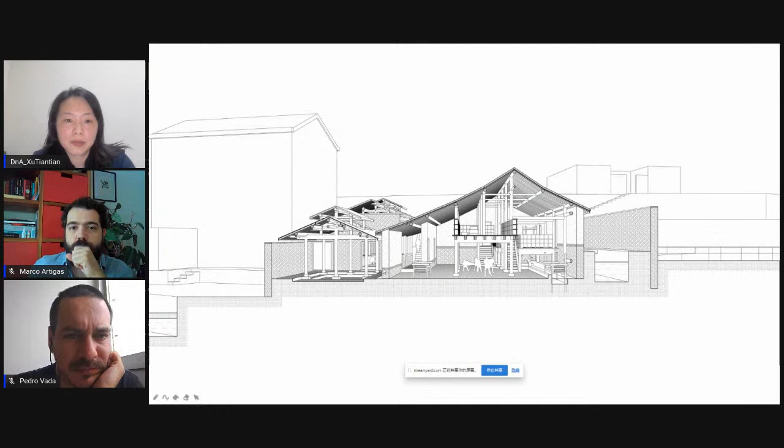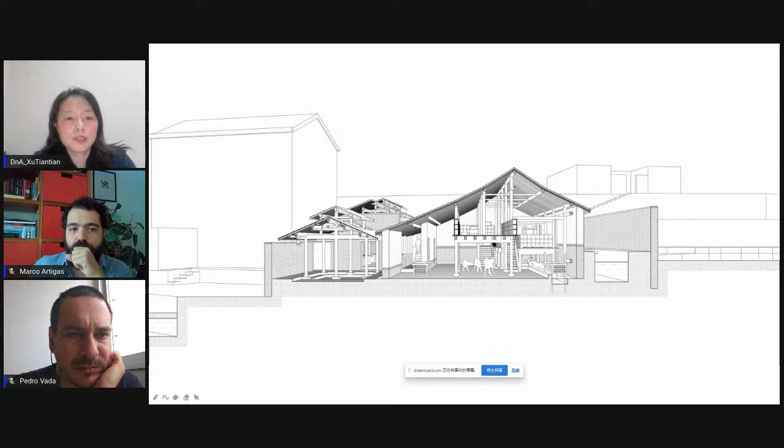The new parts extend out. This is the original mill workshop in the middle, and the new additions are wrapping around it with these stone walls and central wooden traditional structures. All these new additions are done by the local villagers with local techniques.

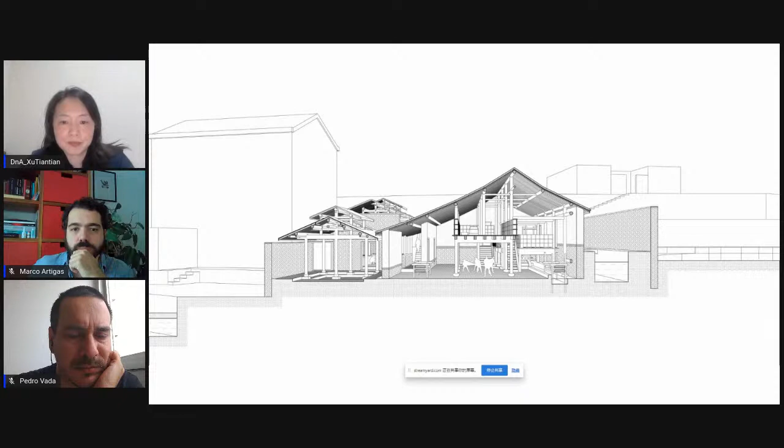From outside, you can see that the old house, the old workshop, is surrounded by or hiding behind all these new additions, facing the creek and facing the mountain.

These are the new additions looking back towards the old house. It's like a kind of embedding in between, adding new layers to the original workshop. You really have to walk into it and go through the layers to explore the ancient mill workshop.

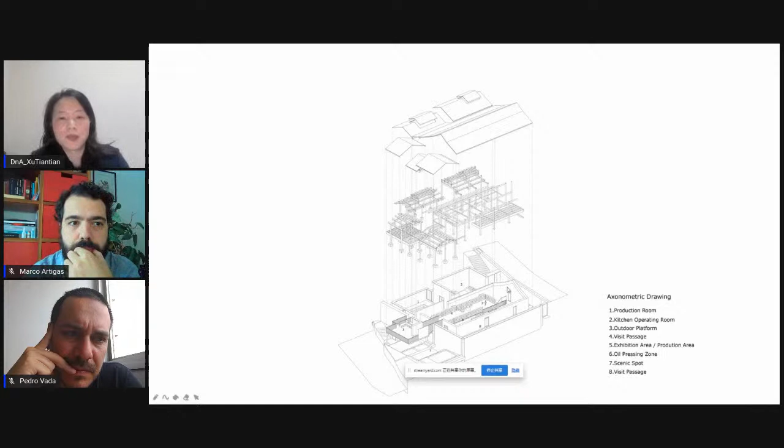This is a picture showing the new additions as kitchens. If you walk into the space, this would be the original space, and all these milling tools or facilities are kept as original.

This is the water wheel, driven by water power guided from the creek inside the space, and the extraction tool, the wooden tool to extract the oil from the camellia seeds.

This is the water wheel, which when activated by the water coming in here, will turn around.

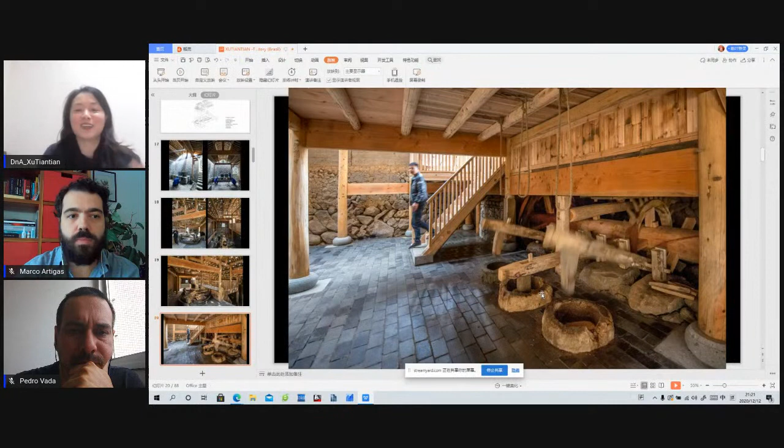I don't know if you have seen this, or do you have that in your country? I think this is one of the common facilities in Chinese villages, almost like a public kitchen or public milling meal house in the village.

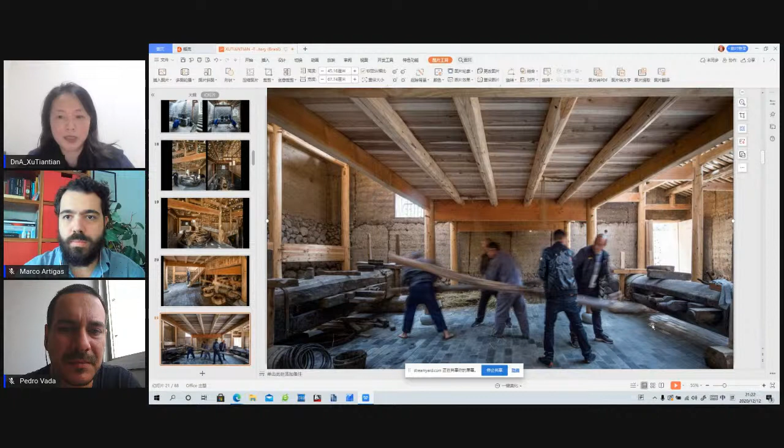That's the extraction machine. Wooden tools are kept as original, and it's used by the labor, by the villagers, for the oil production.

The whole story around this is that the original ancient house is kept as it was before, and it's wrapped by new additions. When you walk into the house and come inside the center of this whole project, you discover the motion and sound of the water power and all these wooden tools, which really make the soul of the space. So in this project, it's about all this kind of finding and the sound, the noise, guiding you through the layers of space.

And here we didn't make any new additions except on the roof. You will see the kind of lighting quality that it's natural light. It's only replacing the original tiles with a different kind of glass tile, which is also a local material. So by adding this light, it's adding a sense of dramatic atmosphere. The whole project is to reveal and set more chapters before you enter and finally discover the central heart of this ancient mill house.

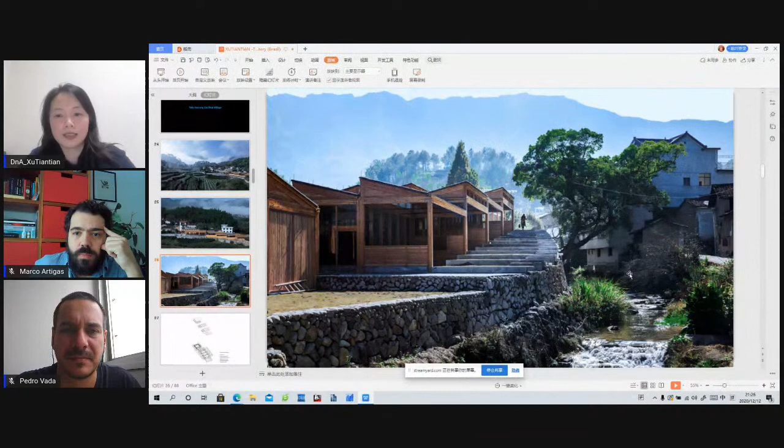The whole factory takes over the terracing site by the entrance of the village, following the topography. Facing one side is a street, and on the other side is a creek again. This is a different village, but for some reason all these mountain villages have a creek running through. I think this was also the original principle when the first generation of villagers arrived here—they picked this site to build up their village and stayed here for 10, 20, or even hundreds of generations.

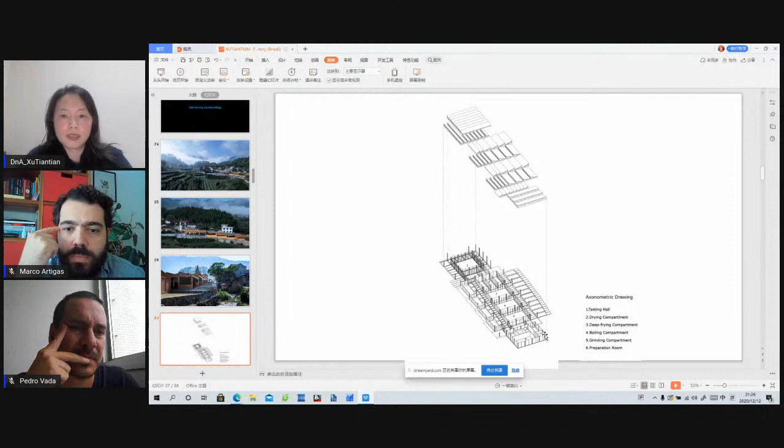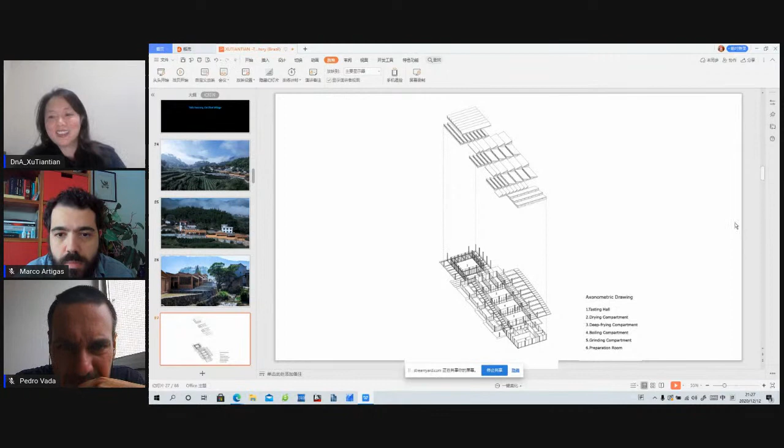That's the Tofu Factory. It's basically a one-story project, building and taking up the terraces along the topography, and the whole factory is divided into six compartments: preparation room where the original material comes in, then grinding compartment, boiling compartment, deep frying compartment, drying and cooling compartment, and also the tasting hall. So we will get to see how tofu is produced in a bit.

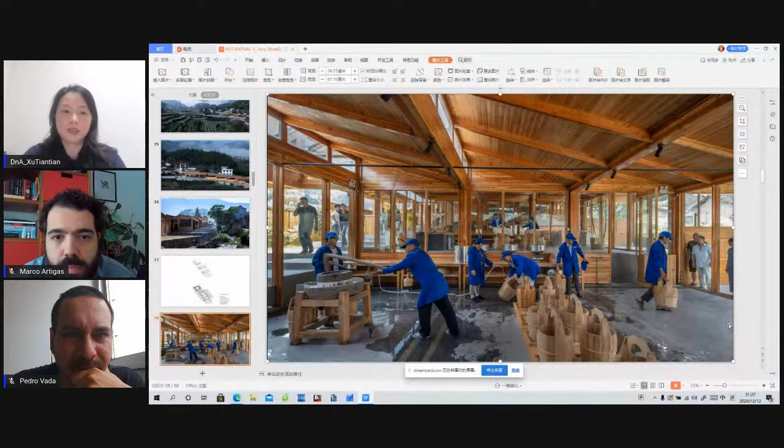These are the factory spaces. Like I said before, this is run by the villager union, and the family workshops become the shareholders of this whole village factory as a collective economic entity. The production is by one of the villager unions organized by the family workshops.

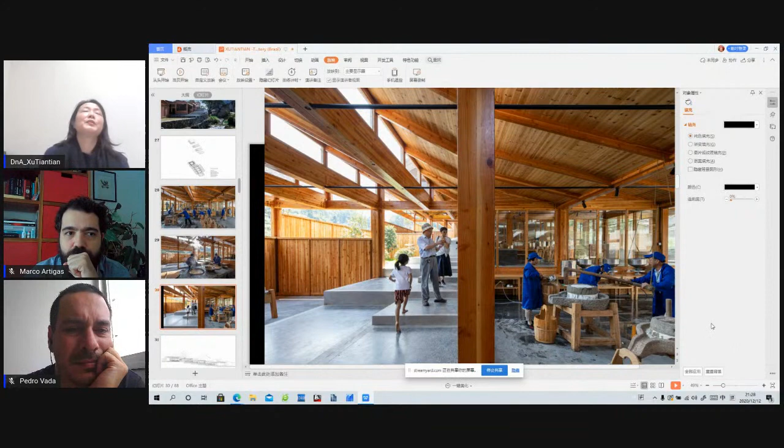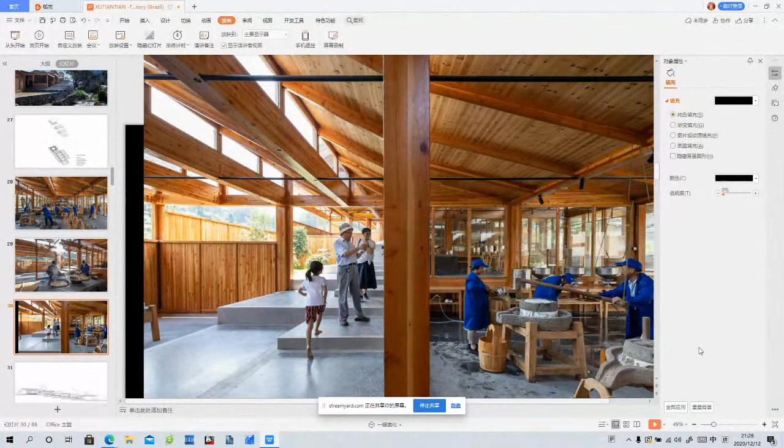There's also a walkway, a passage for visitors to watch the production process. In a way, all this production, either tofu or other unique productions in other villages, become the heritage of this village—intangible heritage—and also become a live museum to showcase the traditions. We think all these agricultural productions are also the heritage and history of individual villages, so in a way, these production factories are also village museums.

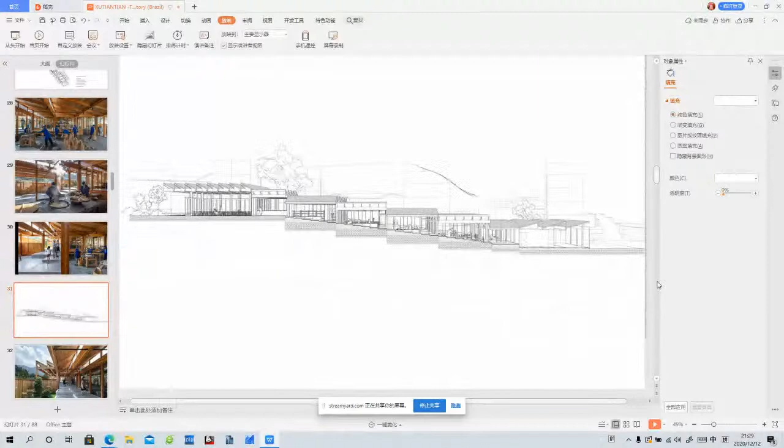That's the section cutting through the space. This is the walkway for the villagers and also for the visitors—a space shared by both. Most of the time it's used by the villagers as a public, leisure space.

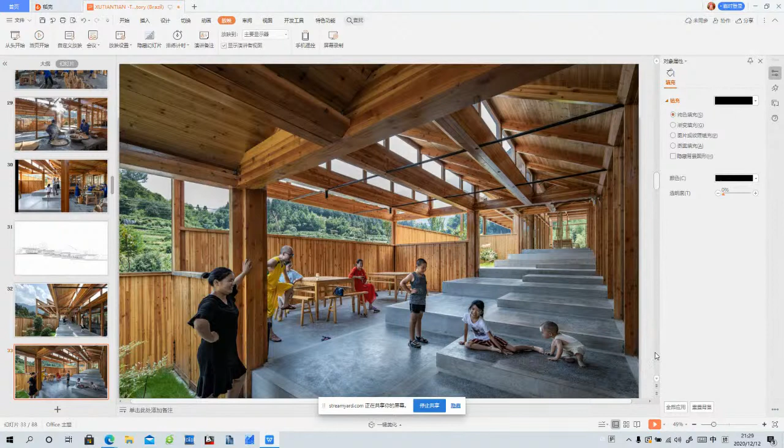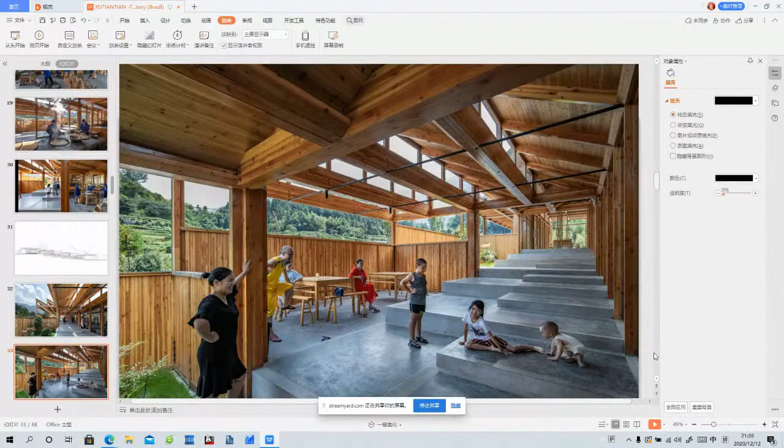The project uses wooden structure and wood material, similar to the traditional houses, but here it's an assembly timber structure to fit with our modern building regulations. It's also showing a warm character in all these spaces, and this is also facing our village and the landscape.

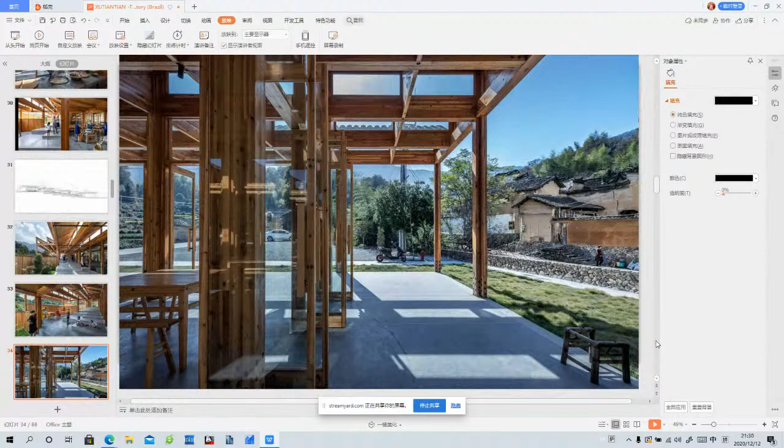In this one, let me see. Are you able to see that I'm going to show the movie here, a short film? Yes. Yes. Okay, great.

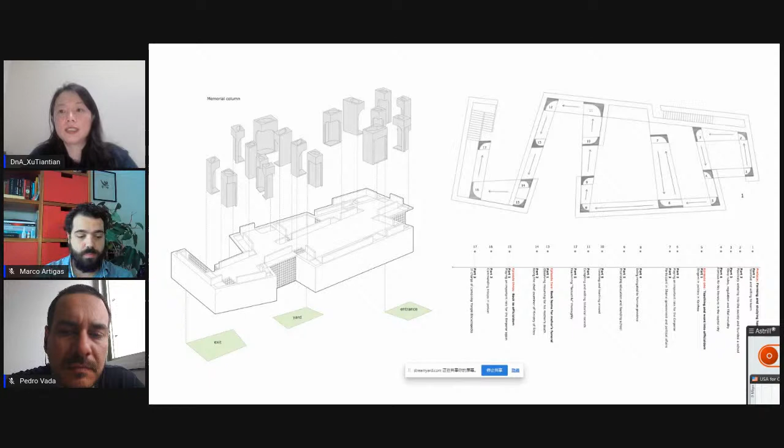So that would be how we're utilizing the space to introduce this ancestor. But in another way, it also frees up space into a public area for the villagers. Instead of having all the exhibitions in the center of the space, it's more going around the corners, taking these structural corners, which are the concrete bearing walls, into the memorial corners.

You can see how it's carved into an image, like a storytelling process. This is the section—it's one story of space, walking into the space. And you will see that each one is almost like an image or a story, a chapter of this ancestor's life.

The stone carving is made by one of the factories surrounding the village, so in a way it's also convenient for the workers and villagers to identify this technique. There isn't too much text or material objects for this ancestor, so it's more about creating almost like a temple for the villagers to respect their ancestor.

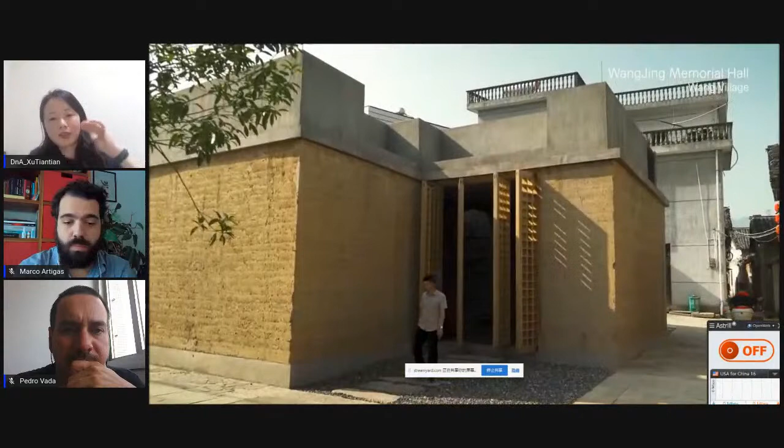This film was taken right after the ancestor hall was completed. You can see on this rooftop the 17 memorial corners extending out, and on top they're covered by glass panels.

So this is also, we call it one of the rural museums. It's easy maintenance and space for the villagers. Basically, it's just like a public space. You can walk in without any kind of a check-in point. It's open to public. And the next project is also a recently finished rice wine factory in another village on top of the mountain.

They claim they have the best rice wine in the whole region because they are at the highest altitude on top of the mountain, so they have the best water or humidity. It's a bit like the wine culture in France or other countries. So yes, the rice wine production from this village, Shantian Village, has become the key heritage and also engages with the acupuncture strategy.

And this is how you enter the village. Here there was an empty lot, also a sunken site on this piece of flat land. And then from this point on, these will be the villagers' houses around the topography. And since this is a sunken space, and also because of the building volume given by the village community, we decided to build this project.

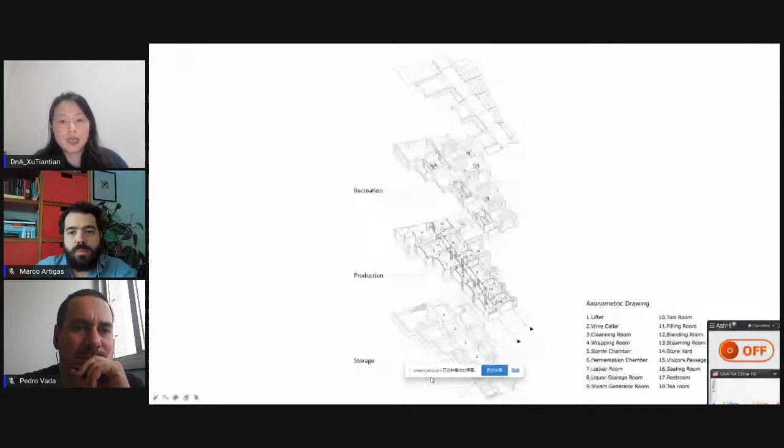This piece of architecture will be a space with 3 layers, 3 stories, and each story has its own program defined by the production needs. So wine cellar storage in the basement, the sunken part, and then production on the entrance level, on the ground level, which also faces the village on one side and the landscape mountain on the other side.

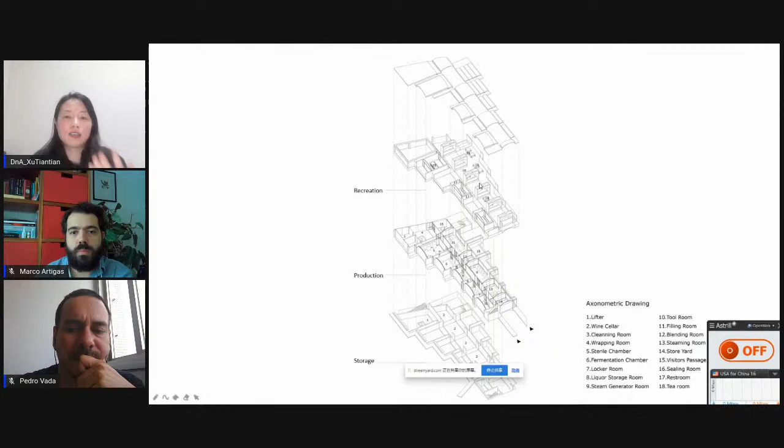And there will be the production factory, also isolated from the public route. On top of that, the second floor will be the leisure recreation space with wine tasting, or just a kind of open leisure space.

The ground level and second floor. And the ground level, because of the wine production procedure, it also needs certain shading on its surface.

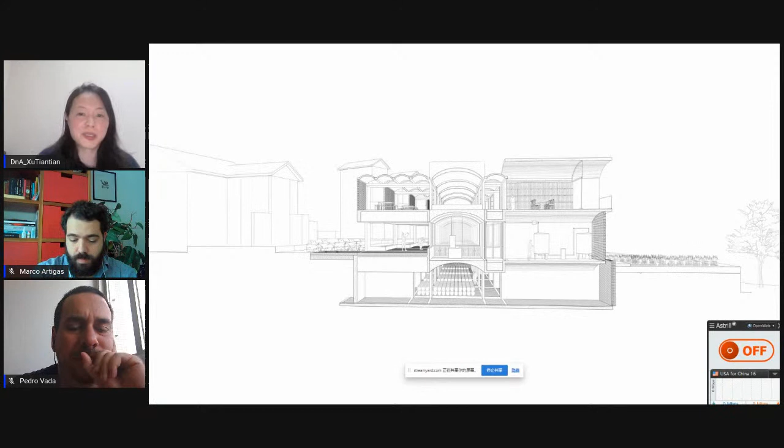All three levels have different kinds of building densities. The wine cellar is the storage, so it's a more compact space. The ground level has this production area and also a kind of passage for the public visitors. This is also open to the villagers as a leisure shaded corridor, similar to the Tofu Factory.

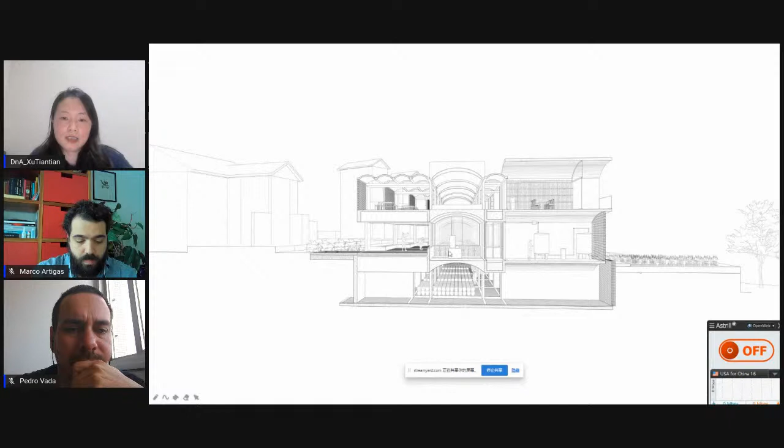It's shared by the villagers and visitors, and also by the rice wine production villager union. On top of that is the leisure space, more connected with nature. So all these three levels have different densities, which is also reflected in the kind of arch on the roof.

The density or openness on the roof - on the ground level it's more like compact storage, darker space, and that was the underground level. So on the ground level, this is the production space, and you can see the rhythm where you have light coming in, and the visitors can observe from the side. This is also showing a different kind of compartment, the procedure for rice wine making.

This is the cooking as well. Each process in the agricultural production engages with the cooking. And then that's the rice wine making, and this is the second level.

It's more open, so you can see that the space has more like a covered space, or voids. It has a lower density of building volume in a way. And that means this level is open for all visitors, for everybody to be shared as a common leisure platform, and also to look out to the landscape.

So in the past 7 years, this project has become almost like a mapping system in this whole region. Each one is telling a story of its own site or location, about its own history or crafts, the tradition in each village. And the interaction of these programs also reflects the key heritage and landmarks of the whole county.

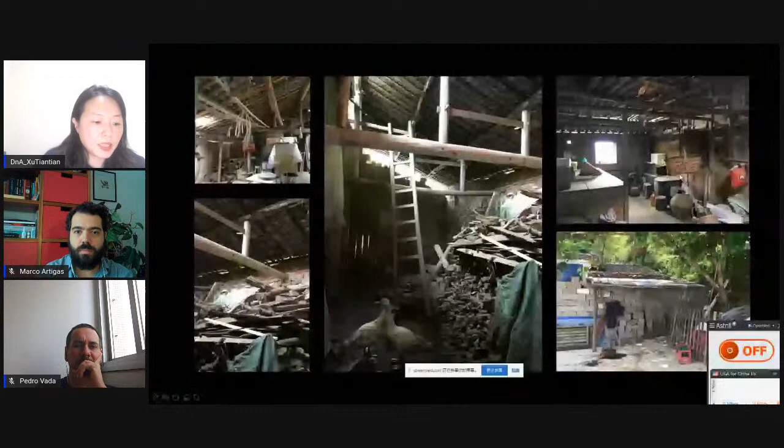The planning and design in this village follows the preservation guidelines of minimal intervention. The renovation is done by local builders with traditional techniques, and the houses at the entrance are converted into

a reception and a canteen for all the villagers and visitors. This also serves daily meals for the elders in the village. That would be the canteen area.

The 3 historical buildings in the center of the village are kept open as public cultural spaces. And most of the houses are refurbished with modern facilities as homestay houses.

For example, all these guest rooms are installed with bedrooms and bathrooms. And all the kitchens and workshops are preserved for visitors to experience the original village work and life.

So there was the preservation, but on the other hand, this village has also developed a new hybrid collective economy to preserve the economic potential within the village and the villagers.